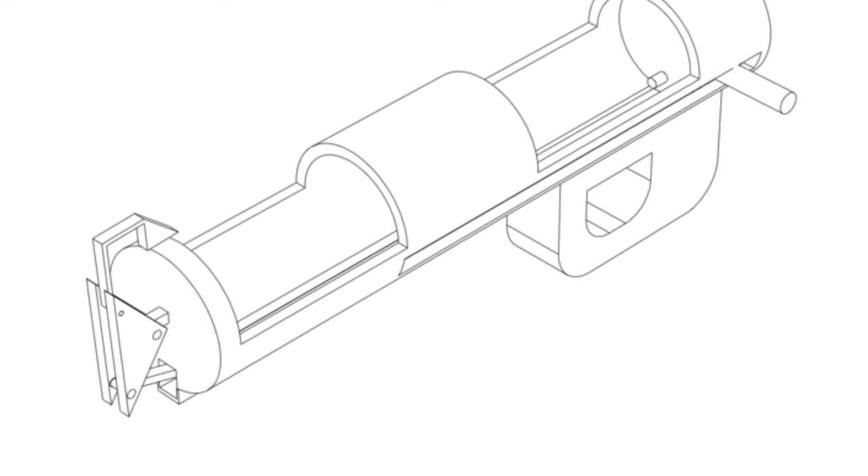Shotgunning is the act of rapidly consuming a canned beverage through a hole punctured in the side of the can. The typical manner in which the puncture is created can be dangerous due to the exposed aluminum, so we designed a handheld, hand-powered solution that will reduce the already high risk of this act.

Our mechanism is a 4-bar linkage consisting of a driven slider and a rotating arm about a fixed pivot position. Given the handheld and portable requirements for this device, we designed it to be 15 inches long and made the frame with a lightweight plastic, while the linkage is made of a steel to withstand the stresses involved with puncturing the can.

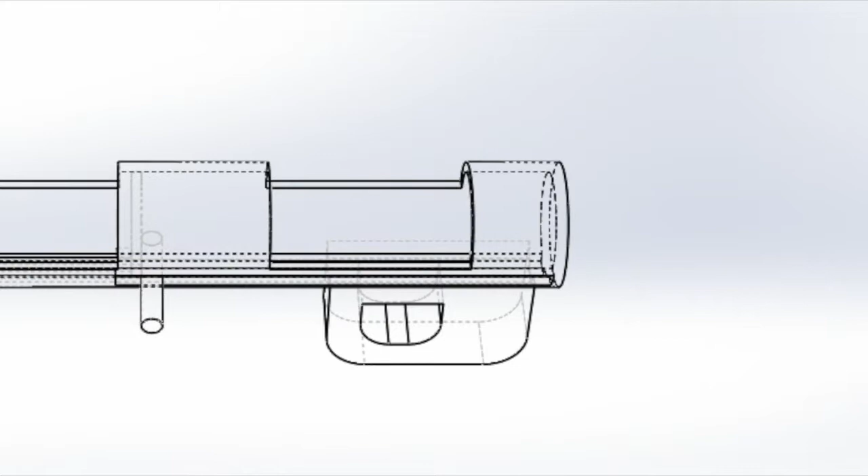The kinematic analysis is used to determine the relationship between the horizontal input and the angular output. This includes determining the radius, puncture distance, and slider length. These attributes are determined using a simple crank and slider vector loop. The vector loop consists of the bottom portion of our mechanical device. Pin C is fixed, while pin A slides horizontally.

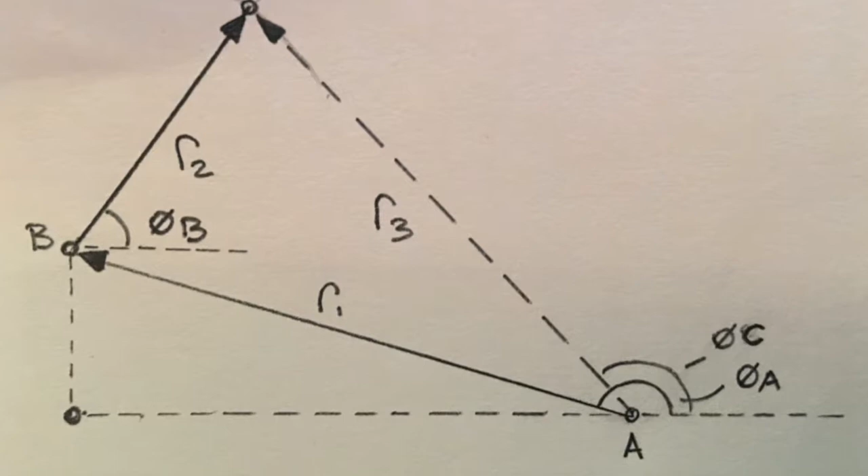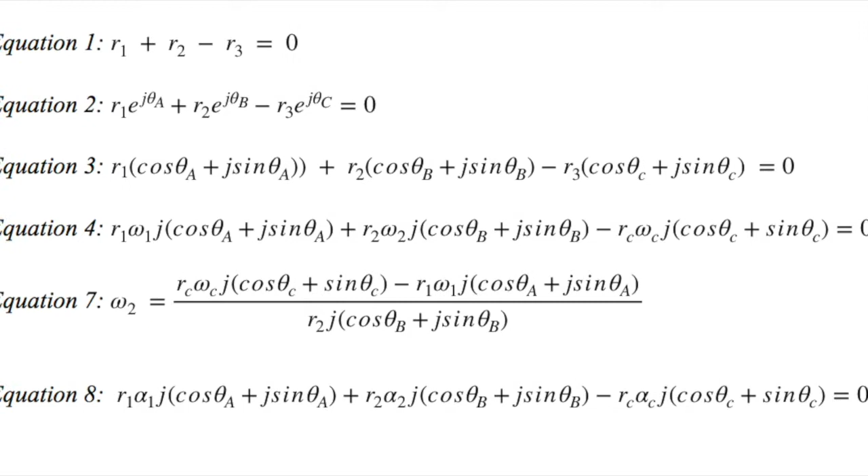Using these equations and optimal puncture location, a radial distance of 2 inches was determined, and a length of 2.44 inches for the slider link was determined to produce an angle of 33 degrees.

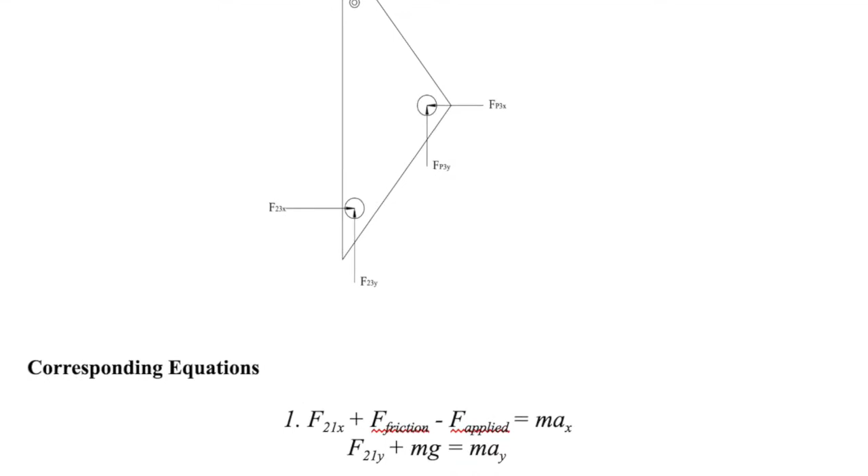Force analysis was performed to analyze forces exerted on each link and joint of the rapid can opening device. The analysis provides reaction forces on each joint, which in turn provide a breakdown of expected forces on each joint given the required load. The calculations utilize free body diagrams to identify the location of the forces.

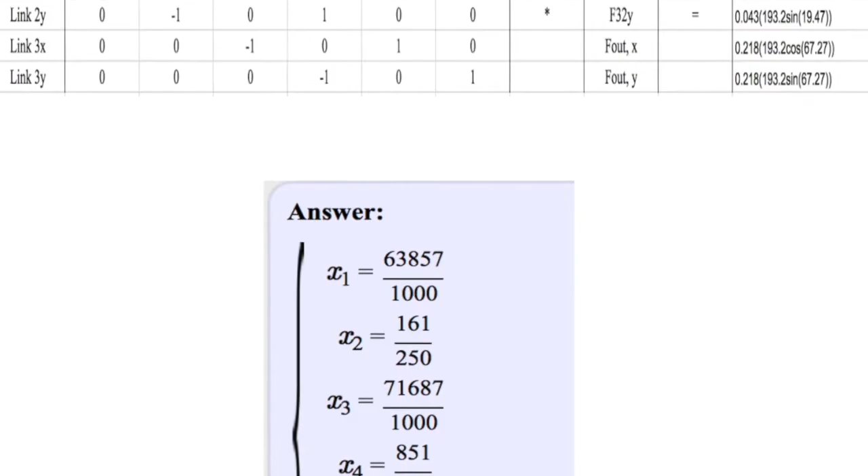Assuming friction at all joints can be neglected, the calculations were performed at the specific instant in time in which acceleration and required torque was equal to the minimum required force to puncture the beverage can. The force required to puncture the can was calculated to be 37.5 pounds. The analysis confirmed that the mechanism would supply a force of 112.7 pounds.

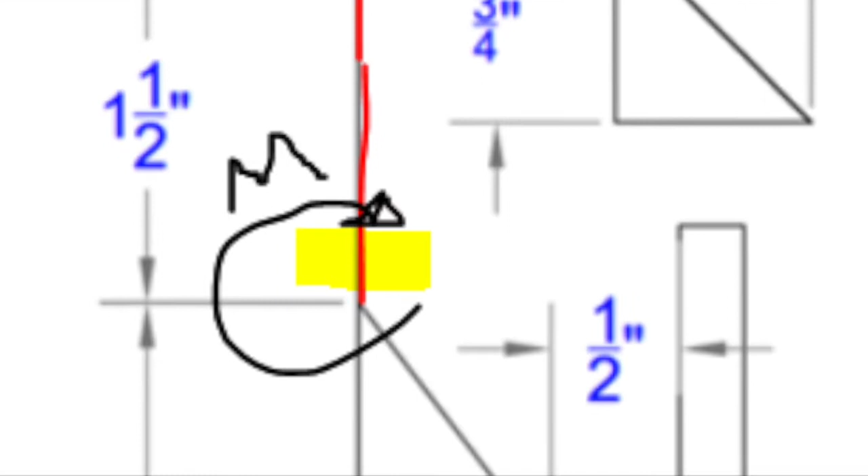The purpose of stress analysis is to locate the point where the system will fail, then to calculate the expected load which causes the failure to occur. This specific device will most likely fail in the yellow highlighted area. The force resulting from the resistance of puncturing the can will partially be directed along the red beam. This will create a bending moment about that highlighted point.

Equation 1 multiplies force by length of the beam to find the moment. Equation 2 is the bending stress at a point. And equation 3 is the moment of inertia of a square beam. Plugging in the known values, we are able to solve for sigma, which is 35.55 pounds per inch squared.

This value, paired with various materials and their ultimate strength, will give us different factors of safety. The factor of safety is simply the ultimate strength over the actual stress.